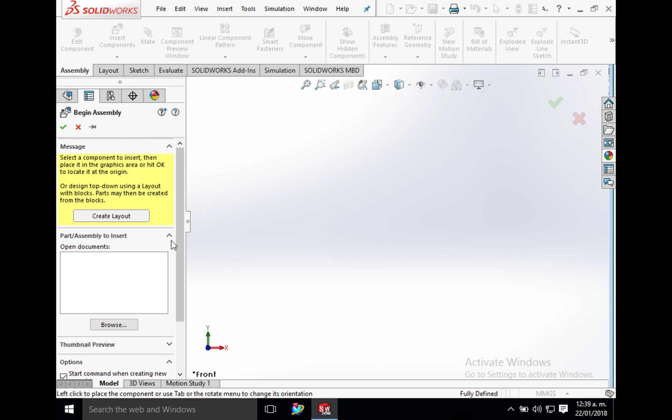So since the last video tutorial was a little bit short, I will do another small piece here just to show you another function of the assembly mode. So you click here in assembly. Now instead of putting another piece, a piece that we created before, into this assembly, we're gonna click here, cancel. And here in insert components, we're gonna choose this arrow and then new part. In this way, we're gonna start drawing our own part in the assembly mode.

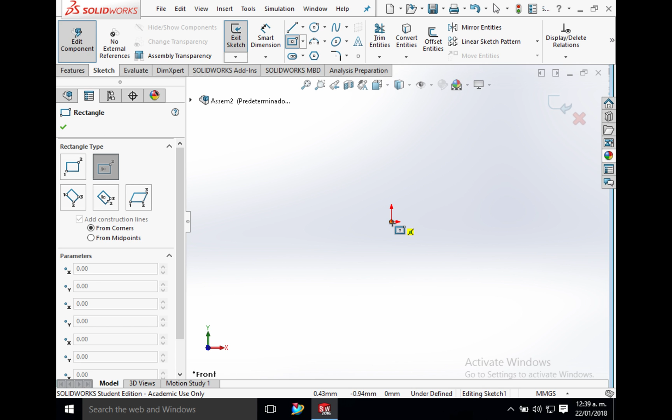So we click here in Alzado or front plane, and then it will be like the normal new piece window where you can start sketching. So for this, I'm gonna go quickly here. You're gonna create a square, smart dimension. You click 40 here, 40 units. Then you click 40 again. Then you go to features, extruded boss, and you choose here 20 millimeter extrusion, and you click OK.

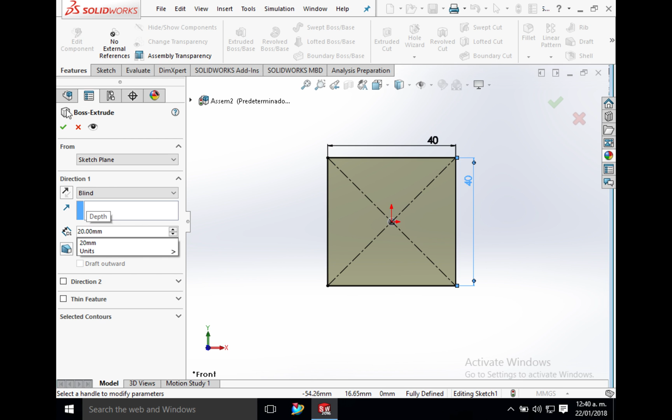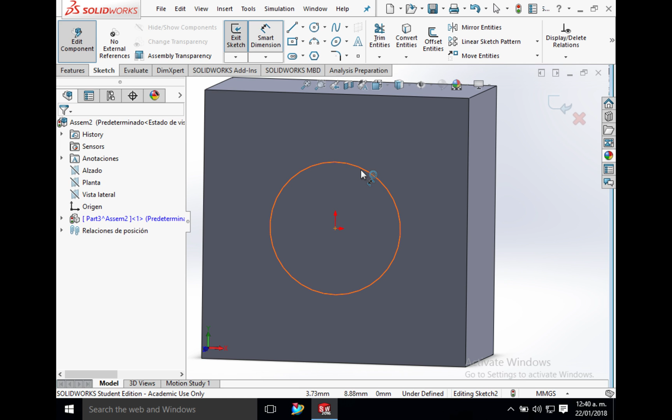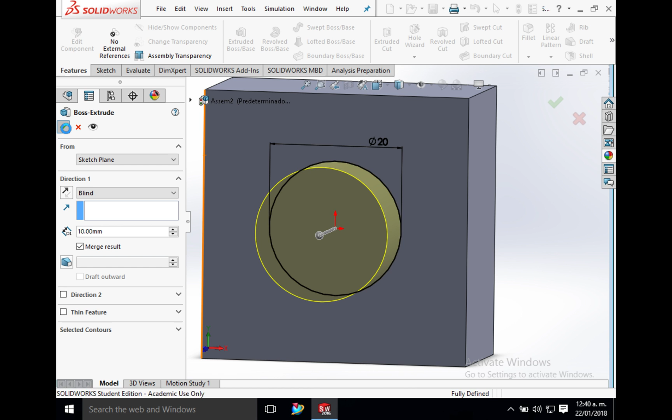Okay. Then you will draw in this side. You will click sketch. Then you will draw a circle with a dimension of 20 millimeters. Then you're gonna click features, extrude boss, and you will extrude the circle 10 millimeters. Okay. You click OK. Then you will start drawing again here. You put a sketch. Then you draw another circle. Now this circle will measure 10 millimeters.

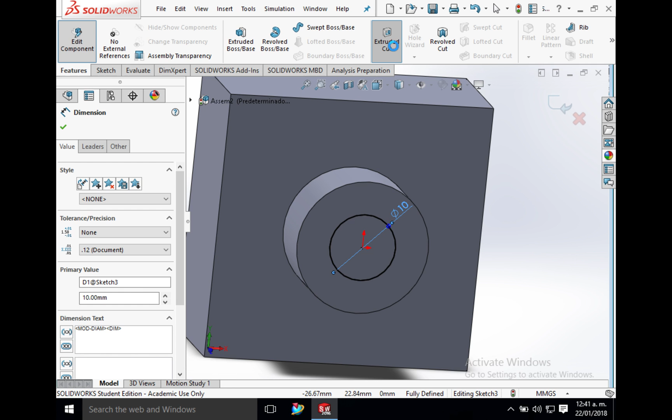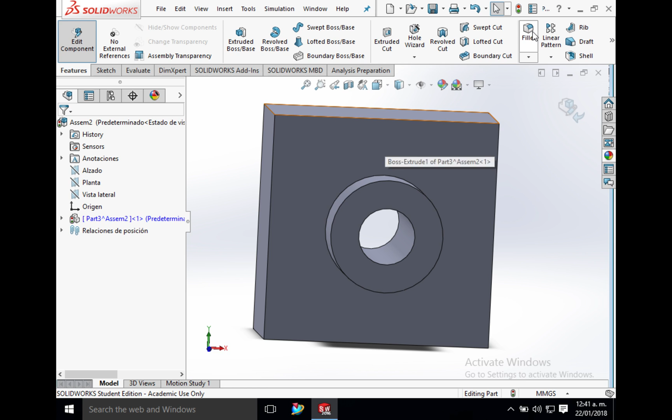Then you go to features and you go to extruded cut, and instead of putting a measurement, you will select this function. Instead of blind, you put through all, which is, as the name says, you will cut through all the piece, and you click OK. Now you have this piece. We're gonna fillet it with a fillet of 2 millimeters. You can choose it here.

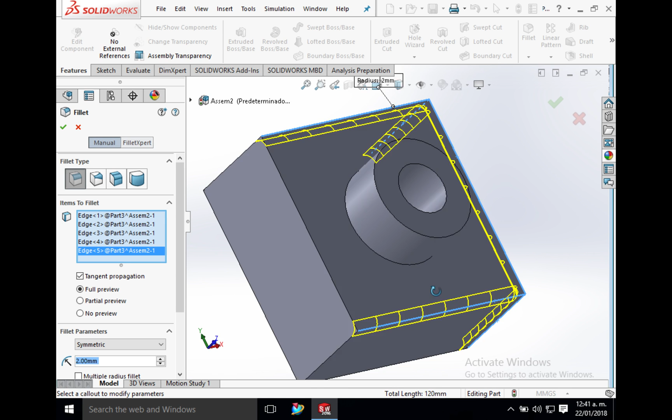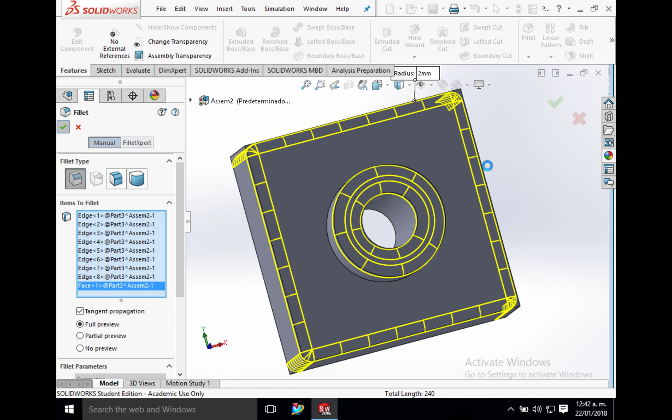Now we're gonna select this edge. We're gonna select this one, okay, this one, this one, this one, this one, and this one, and also this plane. Oops, this plane. Okay, and you click OK. Now we have this piece. We're gonna click fillet again, and here you will choose 5 millimeters, and you will choose this edge. You click OK.

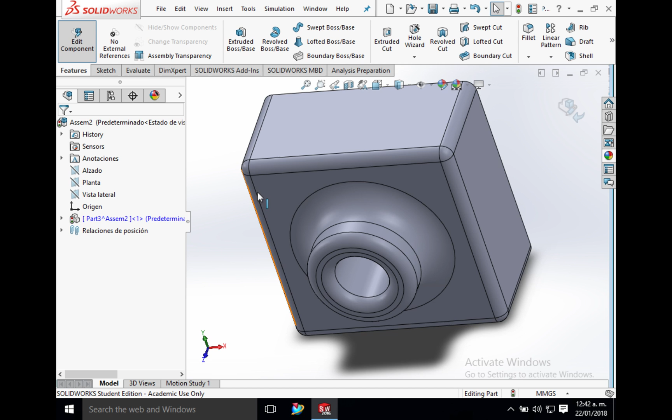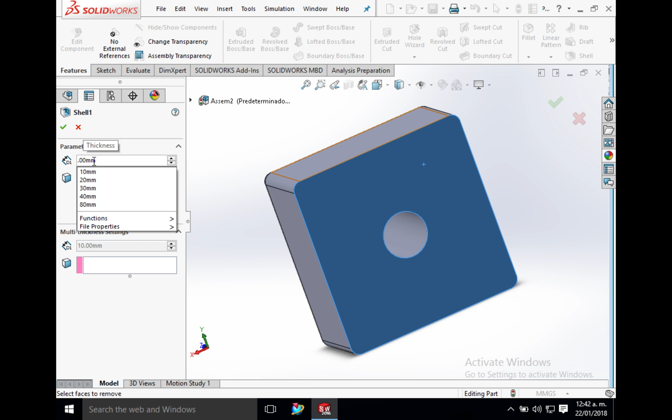Okay. So, I forgot to say, we're building a pencil sharpener. So we go to the other side, and you click shell. You click this face, and you put a measurement of 1 millimeter of shell thickness. You click OK. Now you have this shape. We're gonna create here a small lip so you can assemble a second part.

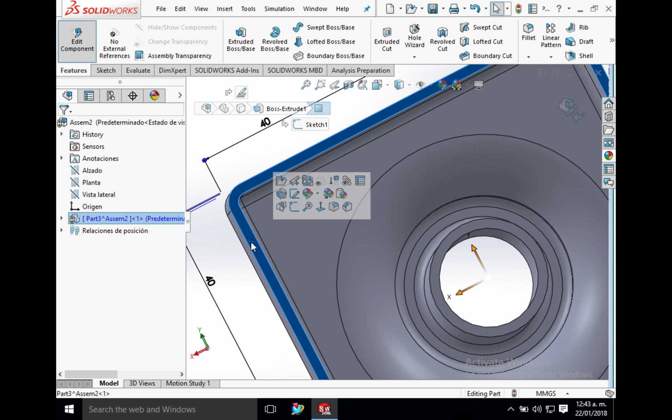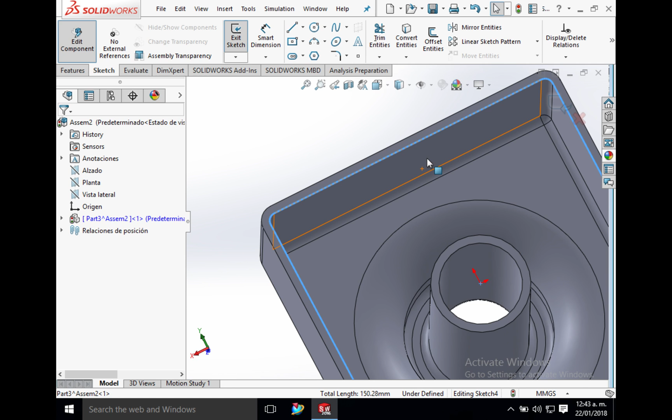So for that, you're gonna click in this plane, then click in sketch, then you will right click. Wait, I want to show you which one. You need to right click in this edge. Right click, then select tangency. And in this way, you can select this interior edge of this plane. And now that you have that, you click Convert Entities, which basically converts this shape into a sketch for you. So you don't have to draw it. You click here.

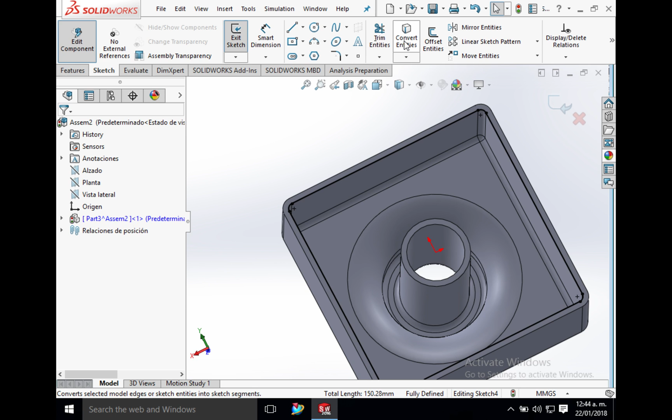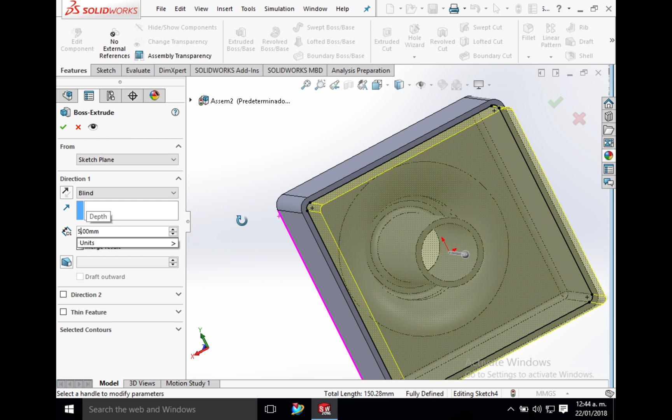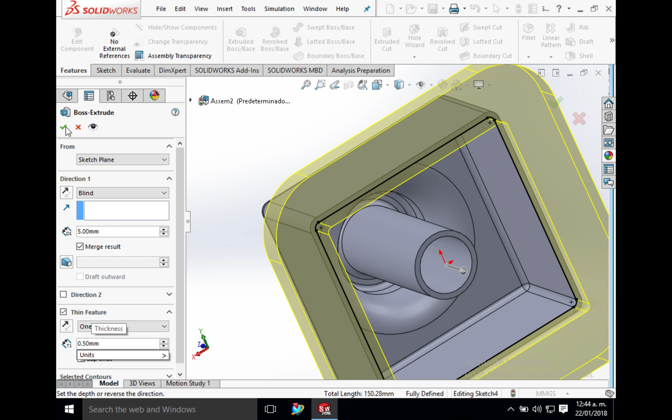Next, you go to Features. You click here in Extruded Boss Base. And here you select 5 millimeters. And just click OK. Then here in Thin Feature, you check it. And since we want the lip to be half of this border, we select 0.5 thickness. You will see why. And you click OK. And you click OK.

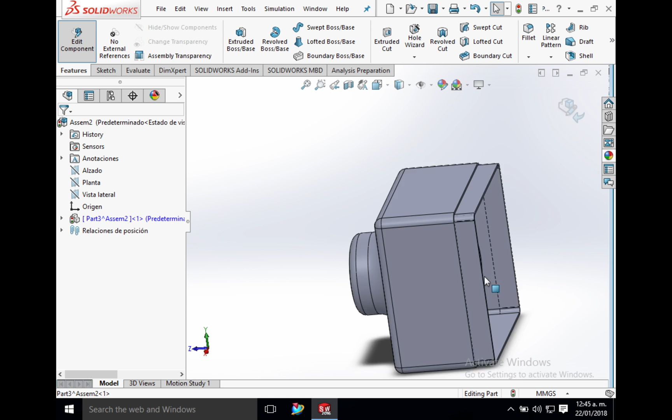Now we have this small lip. So basically, all this part was 1 millimeter, and you create a lip of 0.5 millimeter. Okay. Now we finish our first piece of this assembly. To exit modifying this piece, you click here in Edit Component.

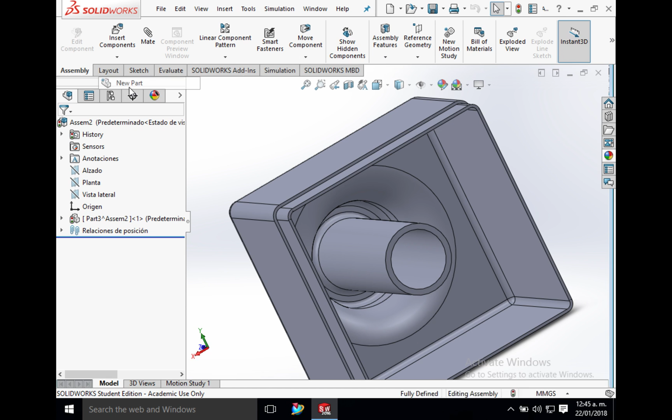Now, to start creating the next one, you do the same as before. You click here, then New Part. Then to select the plane where you will start drawing the part, you will select this plane, the external one.

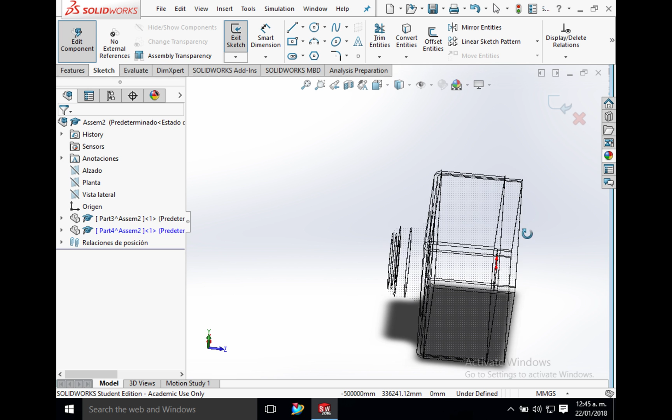And as you can see, SolidWorks differentiates the part you are modifying by showing the other parts as transparent, so you can know which one you are not modifying. So now that we selected that, we're gonna also click in this part in the same plane as we did before. Maybe you can't see it that well, but it's this plane, okay? Then you click it.

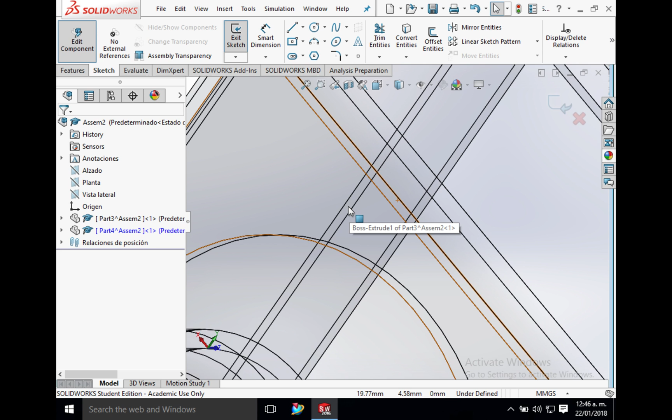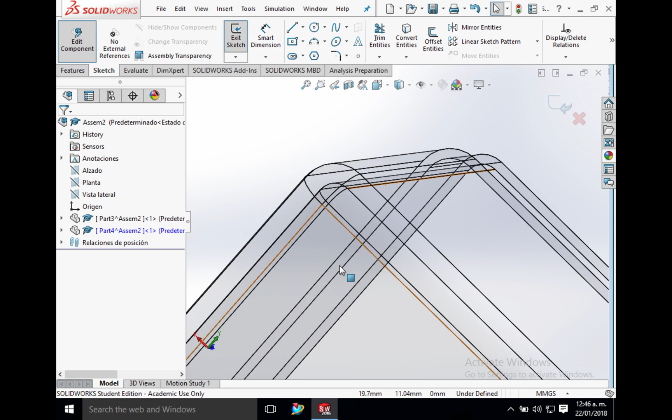Ah, no, I selected the other one. Okay, it's kind of tricky. You need to be very sure you select the right plane. So it's this one. Okay. Let me just be sure where I am. I think I'm okay.

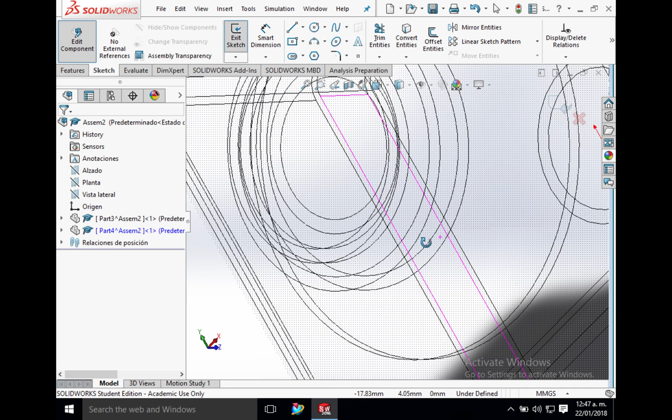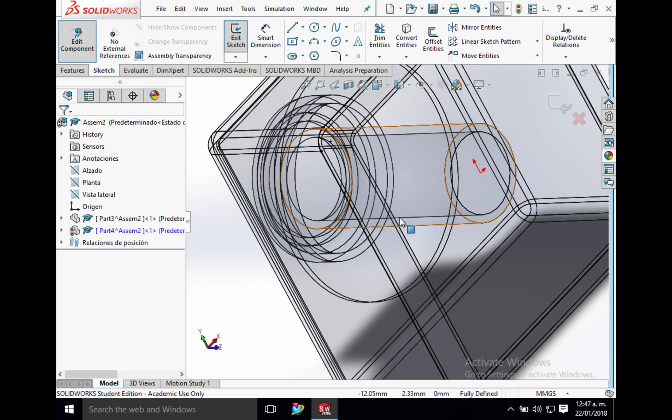Let's click this plane, which is the same one we just clicked. So we click this one again. Okay. Now you see the plane I wanted to select. Now we're gonna also use the convert function, Convert Entities. And now we have this one as a sketch. So we click here in Features, and we click in Extruded Boss.

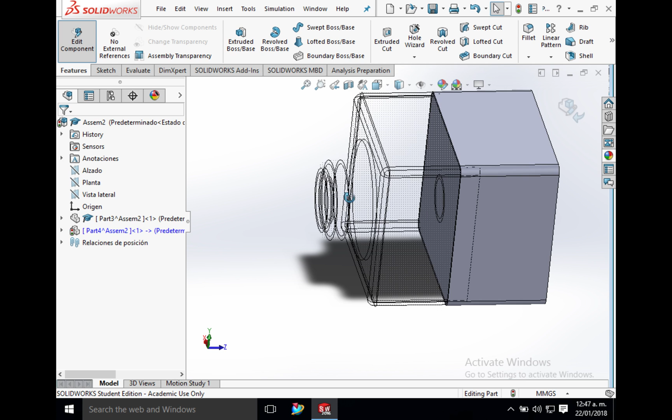So for this one, we're gonna select 25 millimeters. And we click OK. Now we have this new piece. To change this, we're gonna select this plane, click Insert, then Features, then Dome. We're gonna select a dome of 10 millimeters, but we're gonna uncheck this one, just to make this like a tangent.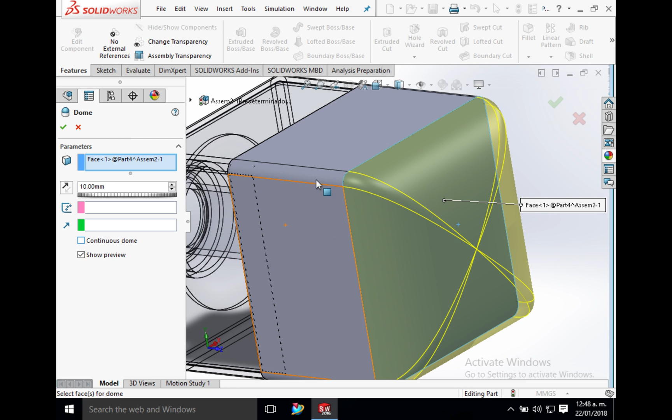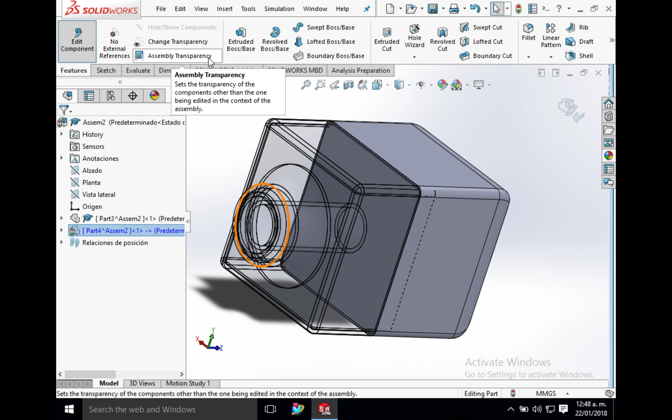And we click OK. Now for the last part of this piece, we're gonna shell this interior part of this second piece. If, for example, you don't want this one to be transparent, you can always change it here, put it opaque. But since we want to modify the interior, it's good to have it, so you can click here in Assembly Transparency.

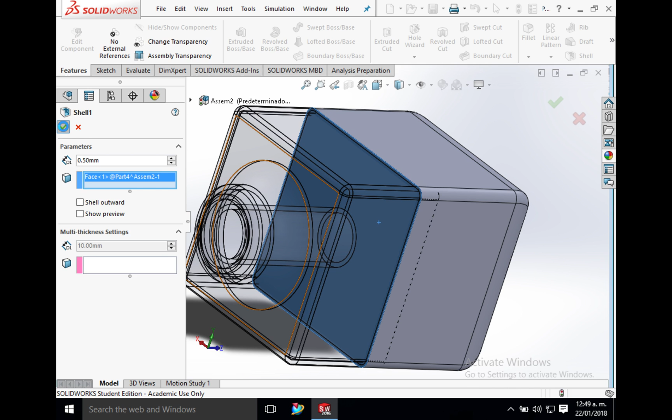Now to shell this part of this second component, we're gonna go here to Shell, and we're gonna select here 0.5. This is the external part of the lip, and we're gonna click this part, and we're gonna click OK. Real good. Now, as you can see, it's shelled.

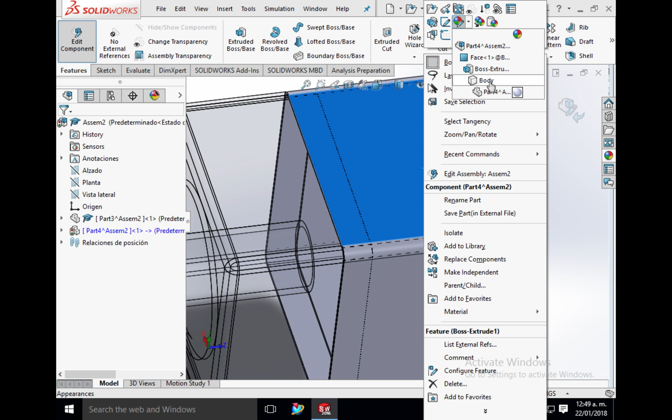Now the final part, we're gonna change the material of the second component. We're gonna right click, then select here Appearance, click the arrow, and select part 4 or part 2, whatever appears at the bottom of this part. Here you can select the material. I select here glass and clear glass just to make it transparent. Oops. You can click here.

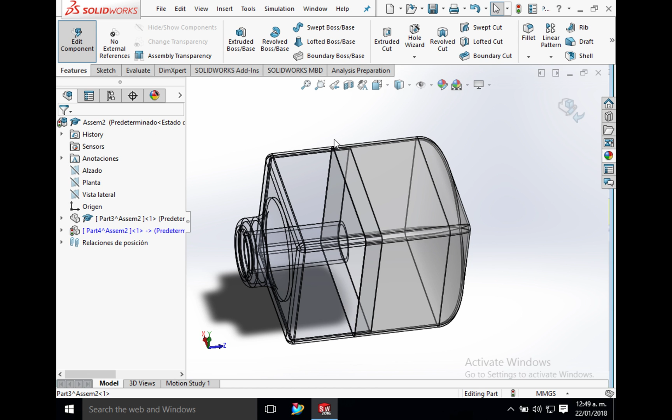Okay. Let's click OK. Now you have this material as the glass, and you can click here in Edit Component to exit modifying this piece. So now our pencil sharpener is finished, as you can see.

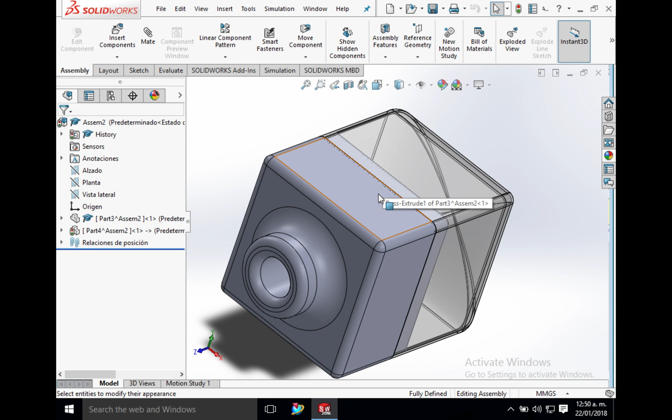In case you want to change the dimensions of your pencil sharpener or other assembly you create, you can double click, for example here, and as you can see there's some dimensions here. Imagine I want a bigger pencil sharpener, so I double click here and I put here 80 millimeters.

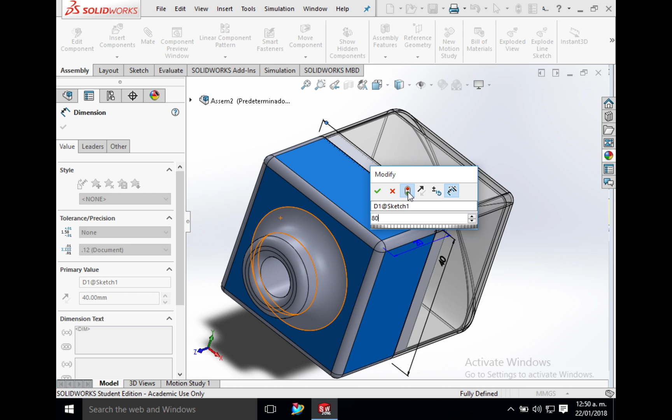To really see the effect in this assembly, you need to rebuild the assembly. So you click here, and now it rebuilds it, and you click OK. So this is the end of the second tutorial for today.

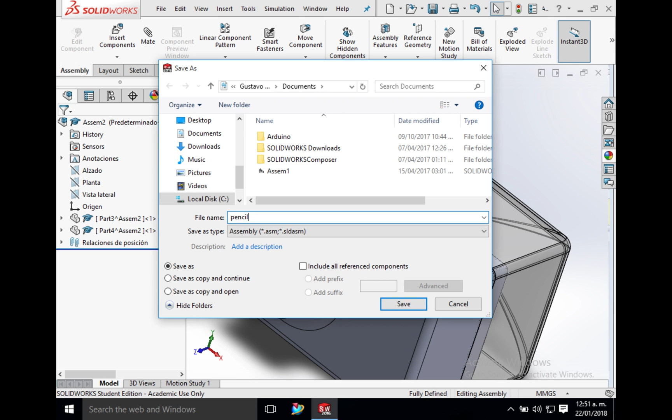You save it as whatever you like. Pencil sharpener. Okay. As assembly. Save. Okay. Good. No problem.